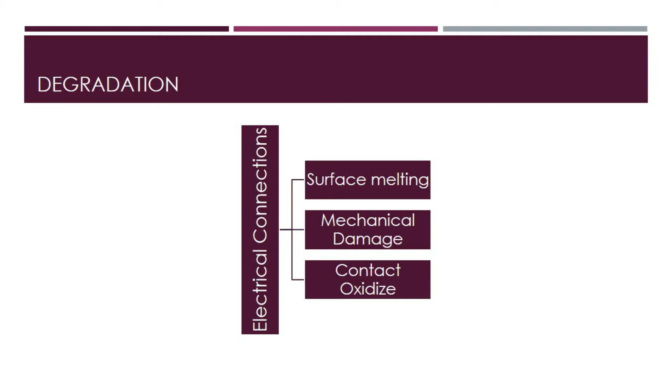The amount of breaker operations, environmental considerations such as harsh weather conditions, and how often repairs were conducted are all elements that contribute to degradation. Manufacturers' datasheets for reclosers frequently list the number of mechanical operations that can be performed before the device would eventually degrade.

Harsh weather conditions, such as fluctuating moisture conditions and ultraviolet exposure, can cause moisture to enter the recloser system, causing it to malfunction. Corrosion and poor lubrication of the mechanical operating mechanism can further deteriorate performance, resulting in locked linkages. The lifespan of a pole-mounted recloser might be greatly reduced due to environmental factors.

UV radiation, frequent cycles of wet and dry weather, wind conditions, and pollution all contribute to the recloser's shorter lifespan. Material deterioration and electrical erosion can occur under such circumstances. Now, when a material's electrical properties deteriorate, leakage currents might emerge. Seals and gaskets can deteriorate, allowing air, moisture, and contaminants to access the recloser's internal workings. The quality of seals and gaskets thus must be maintained at all times.

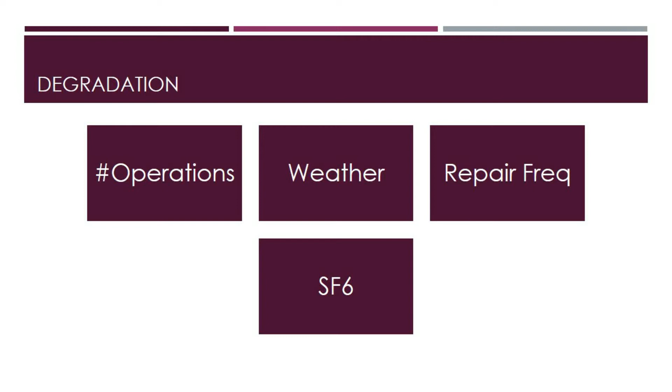Lastly, a lot of the recloser models that you see do not contain any oil. Because oil decomposition induced by switching contributes to interrupter deterioration, the vacuum interrupter design degrades less than an oil interrupter, especially when switching occurs often. The longevity of a recloser is also determined by the device in question, notably its mechanical components. The number of mechanical operations allowed before degradation is commonly indicated on your recloser's datasheets issued by the manufacturer.

So for testing the condition of oil in oil-insulated reclosers, there are several tests that can be used, and they're the dielectric strength, moisture, neutralization number, dissolved gas analysis or DGA, as well as the good old visual inspection. So let's go over each of these.

So the first type of test is the dielectric strength. Insulating oil's dielectric breakdown voltage is a measurement of its capacity to endure voltage stress without failing. Under specified test conditions, it is the voltage at which a breakdown occurs between two electrodes. Now, the primary purpose of the dielectric strength test is to detect electrically conductive impurities in the oil, such as water, dirt, moist cellulose fibers, or particulate matter. A high dielectric breakdown voltage, on the other hand, does not actually imply the absence of all impurities.

The second type of test is the moisture test. Water can appear in insulating liquids in a variety of forms. Visual examinations can reveal the existence of free water. The oil will appear murky, or detached water drops will appear on the bottom surface. Filtration or other methods can be used to eliminate the presence of this free water. Dissolved water can alter the dielectric breakdown of insulating oil, but its importance is governed by a number of factors, including moisture saturation percentage and the amount and type of impurities.

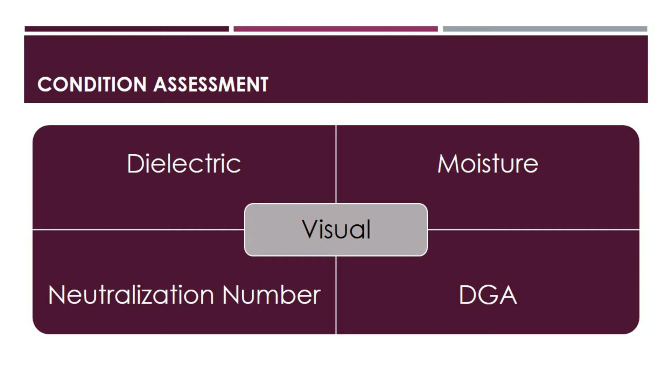Now, the fourth type of test is the dissolved gas analysis, also known as DGA. The dissolved gas concentrations of the different gases are measured and analyzed as part of DGA, which covers gases such as hydrogen (H2), carbon dioxide (CO2), carbon monoxide (CO), methane (CH4), acetylene (C2H2), ethylene (C2H4), ethane (C2H6), oxygen (O2), as well as nitrogen (N2).

The combustible gas concentrations in oil indicate things such as partial discharge activity, internal arcing, or overheated insulation. The last type of test is the visual inspections, and they are frequently the most effective method for detecting common problems that, if not addressed, can escalate to more serious problems.

Now, visual inspections of pole-mounted reclosers will reveal a lot of things. For example, tanks that have been damaged or degraded, the bus insulation condition, corroded or loose terminations, any deterioration of the control and operating mechanism, any oil leakage in oil-insulated reclosers at bushing metal contacts, flanges, breathers, pipelines, or gauges, any contaminations, chips, cracks, and flashover burns, and particularly in vacuum reclosers, the vacuum bottle area.

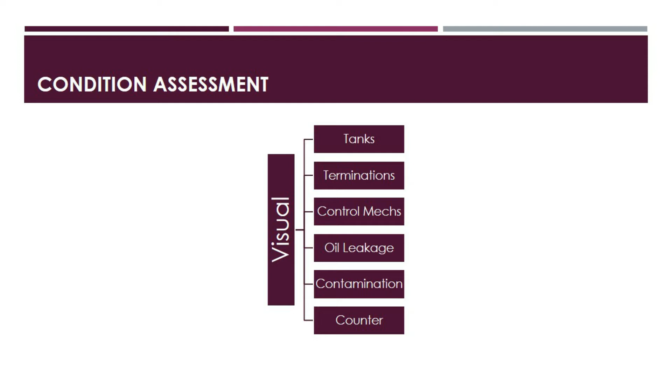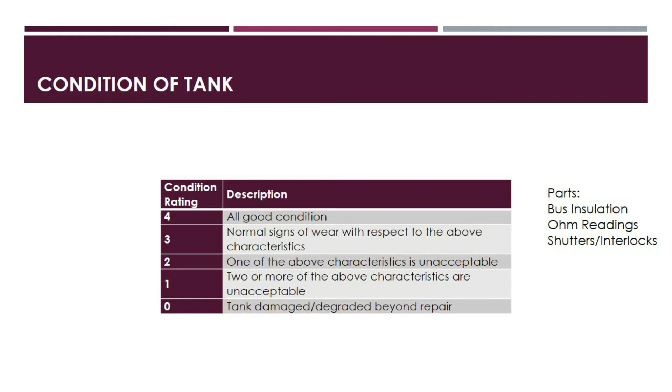The third category is condition of terminations. So for a rating of 4, it means the terminations are tight, free from corrosion, and show no signs of overheating. For a rating of 3, it means that there are minor signs of wear regarding the terminations. For a rating of 2, it means that there are significant signs of degradation with respect to what I've mentioned, but they do not impact safe operation of the recloser.

For a rating of 1, it means that there are major deficiencies of the terminations with respect to the characteristics that I mentioned, like the tightness, the degree of corrosion, overheating, etc. And it should require repair during the next scheduled outage. And lastly, for a rating of 0, it means that there are emergency deficiencies with respect to the terminations, whether it is the looseness, the corrosion, or the heat. And this requires immediate repairs or replacement.

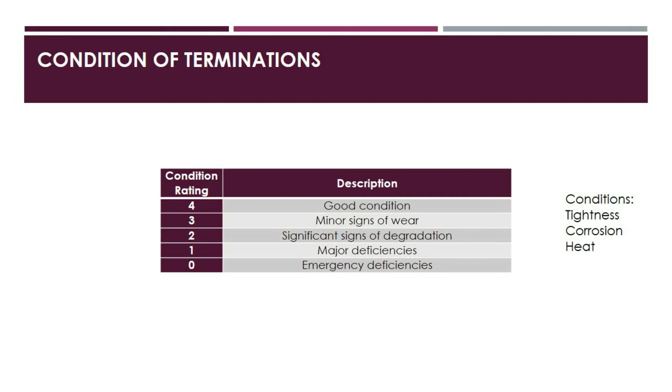Remember in the condition assessment, I was talking about the counter readings and why most utilities probably wouldn't reset the counter readings and just keep on reading during the entire asset life cycle. Well, here is the category for counter reading, which is our 4th category. So here, it basically is referenced against the maximum rated number of operations suggested by the manufacturer. So in this case, the counter reading would be very helpful during visual inspection.

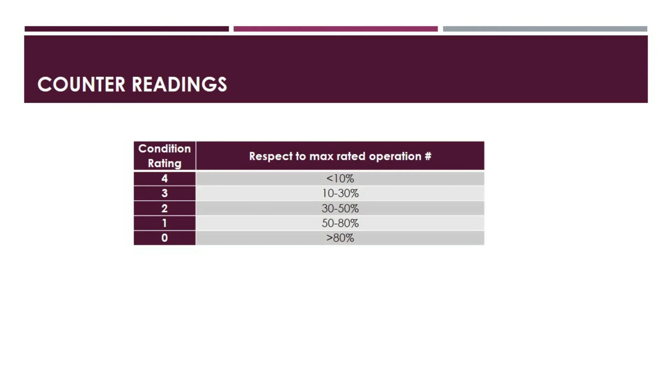So for a rating of 4, it means that the counter reading is less than 10% of the maximum rated operations. For a rating of 3, it is between 10 to 30% of the maximum rated operation number. For a rating of 2, it is between 30 to 50%. A rating of 1 is between 50 to 80%. So rating of 2 is 30 to 50, rating of 1 is 50 to 80. And for rating of 0, it is any counter reading that is higher than 80% of the maximum rated operations suggested by the manufacturer.

Now the fifth category is for oil type reclosers only, and this is oil leaks. So for a rating of 4, it means that there is no evidence of oil leakage at any of the bushing metal interfaces, flanges, breathers, pipes, or gauges, and the oil levels are deemed to be acceptable. For a rating of 3, minor oil leaks exist, but moisture ingress is unlikely. For a rating of 2, there is clear evidence of oil leaks on the recloser, but the rate of loss is not likely to cause any operational or environmental impacts.

For a rating of 1, it means that there is significant oil leakage and probably moisture ingress on the recloser. So you might have a need for major reconditioning or replacement of the recloser. For a rating of 0, it means that there is major oil leakage and the moisture ingress is so bad that the whole thing is actually beyond repair.

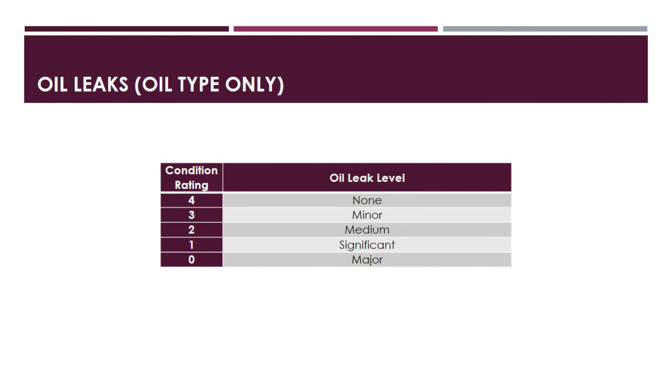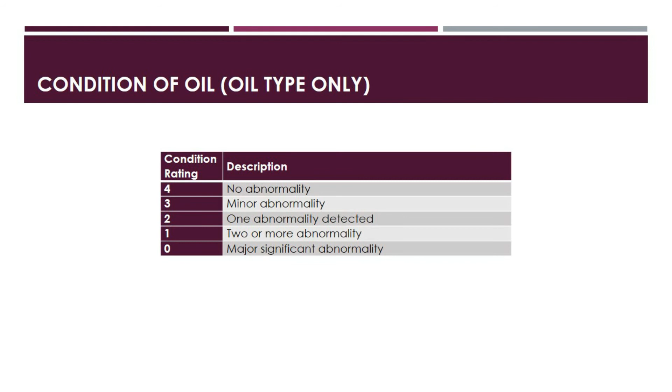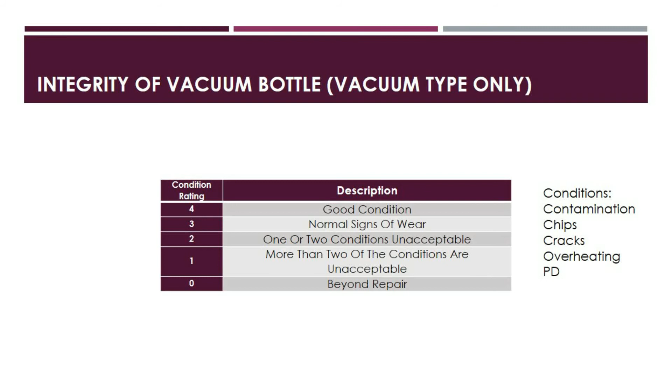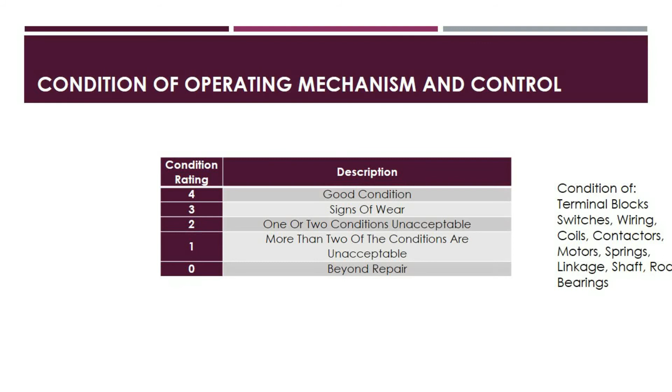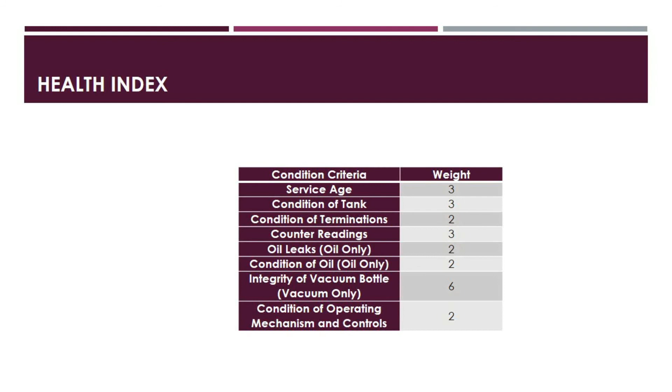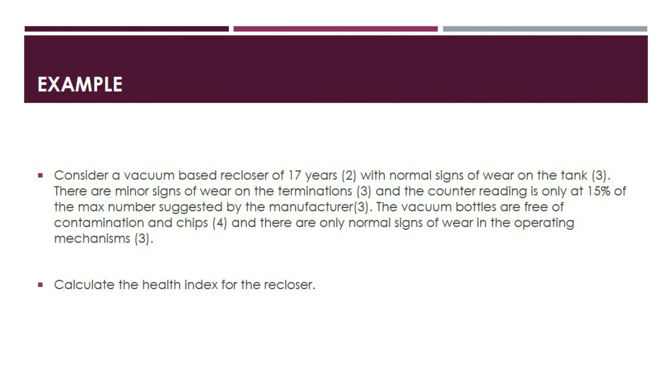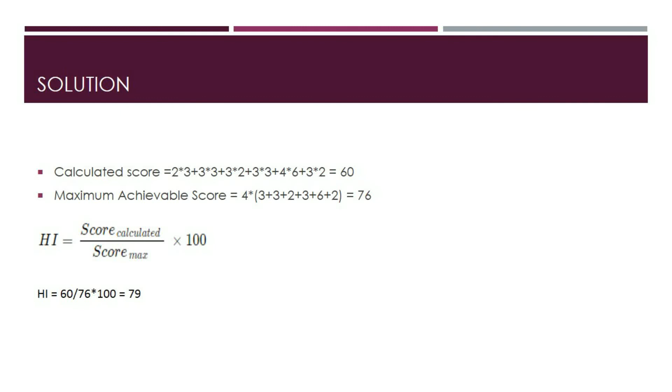So of course, we first calculate the calculated score, which is basically summing up the rating times the weight of that particular category of the health index. So in this case, we ended up with a score equal to 60. Then we calculate the maximum achievable score. So it's the maximum score, or 4, multiplied by the sum of the weights combined. So in this case, we get the number 76. So it'll be 60 over 76, times 100, which is equal to 79. And as mentioned in the fundamentals previously, a value between 70 to 85 is considered good, and as such, there might be deterioration of some components and only normal maintenance is needed.